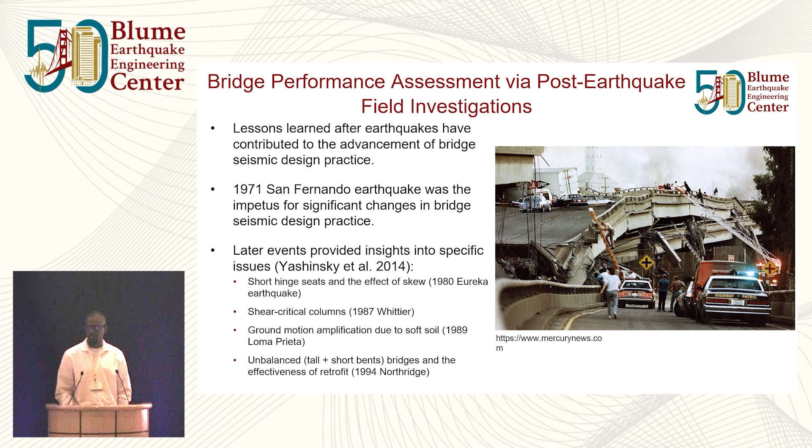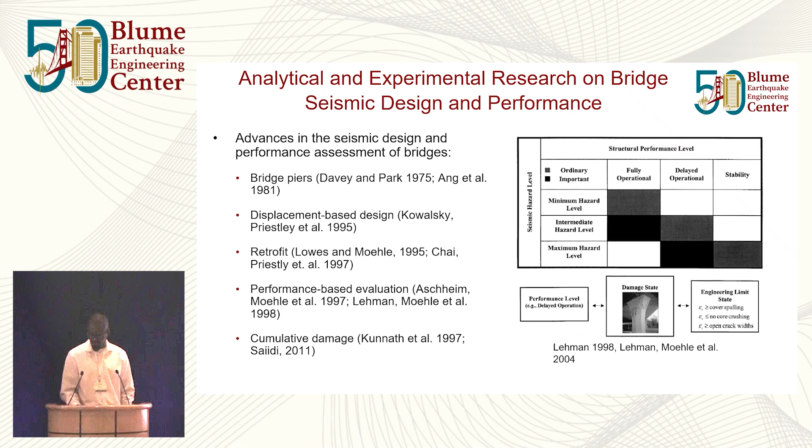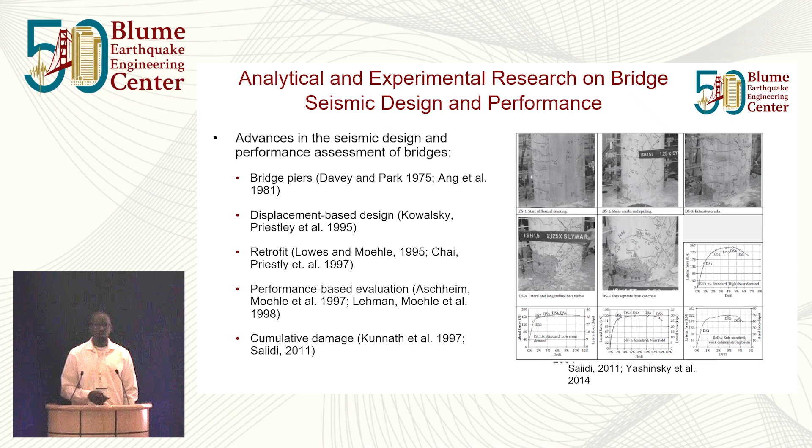And cumulative damage of bridges, that's something that we as a community started thinking about as early as the 1990s, and we continue to think of it a lot today because it has a lot of implications to the functionality of not just bridges, but transportation networks in general. And so a lot of that research has both informed and been informed by a lot of the guidelines that have been developed over the years.

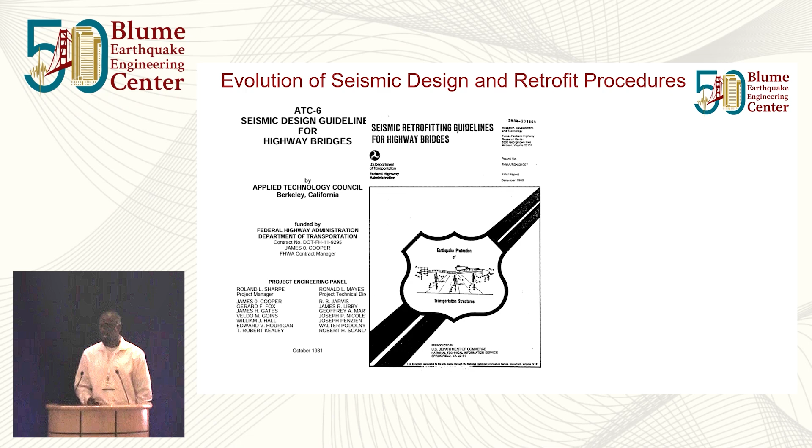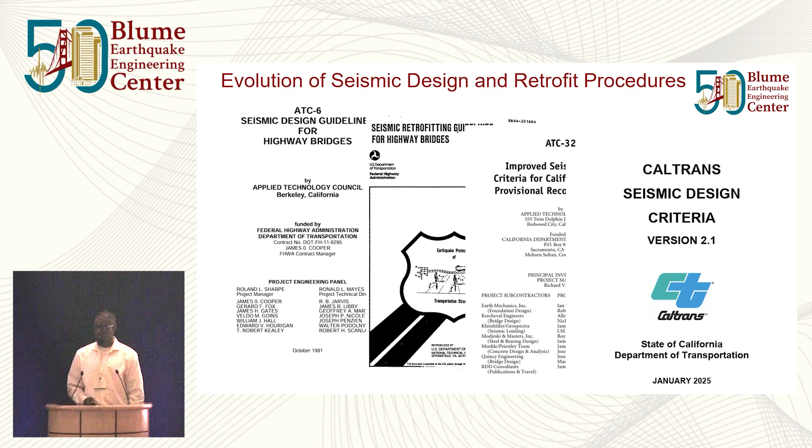So one of the things we learned from both the Loma Prieta and the Northridge earthquakes is that with damage to bridges, you can have consequences that propagate throughout the transportation network. And so we started to think about ways that we can develop these large-scale simulation models to manage the risk to these transportation networks.

And to give you a sense of the scale of the problem, for the Bay Area bridge network, we have more than 4,500 bridges, and these are connected by a road network with more than 32,000 segments, accommodating more than 20 million trips per day. And there are other modes of transportation that facilitate millions of trips per day.

So very early on, Professor Anne Kiremidjian and Nesrin Basöz did a study looking at data from the Loma Prieta and the Northridge earthquakes. The idea here was to do a data-driven investigation of the damage during these two earthquakes. I have one particular finding from that study that I thought was interesting.

I know there are a few people in the room developing these large-scale simulation models for bridge networks, and it's a single number, but I think it's a good number that can be used to sort of ground our models in some sort of reality: less than 5% of the bridges exposed to ground shaking were damaged. So that's something we can keep in mind.

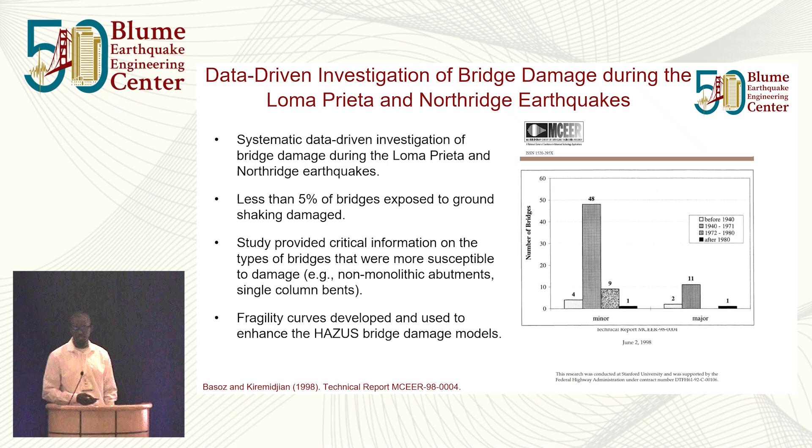And so this study was published as part of an MCEER report, and it also provided very important information on the types of bridges that were more susceptible to damage. And ultimately, they also used that data to develop fragility curves that were implemented in HAZUS, which is widely used even today.

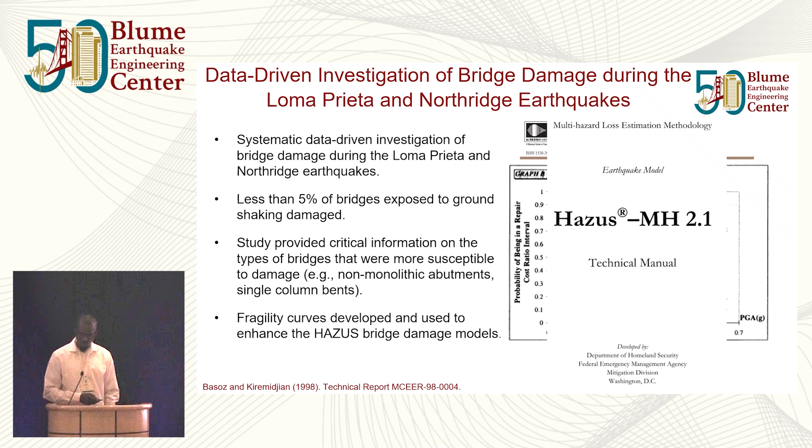Later on, Professor Kiremidjian and her colleagues basically pioneered these large-scale transportation models that looked at not just different types of seismic hazard, but brought together the inventory of the network as well as the transportation operations within that network, to quantify risk not just in terms of repair costs and physical losses, but also in terms of operational loss, things like accessibility, delays and things like that.

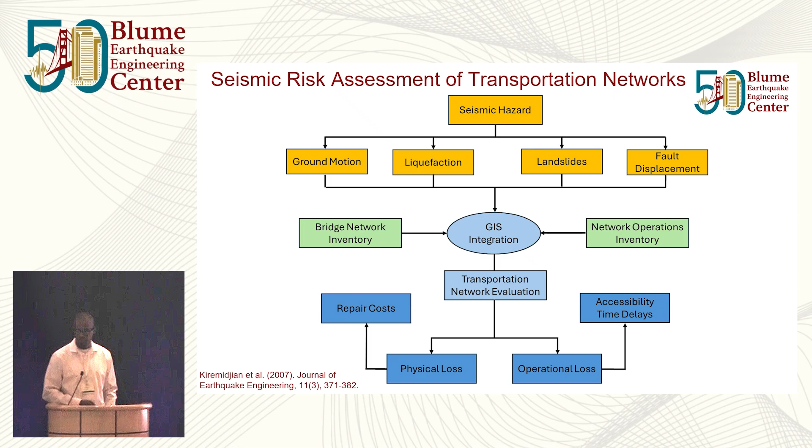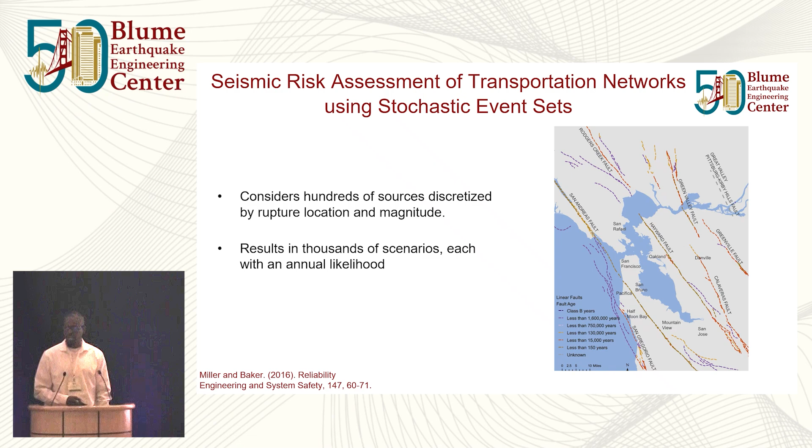Again, building on that, Jack Baker and his team started looking at these transportation systems, but instead of looking at just a single or a few scenarios, they started looking at thousands of scenarios. So this slide is based on some work by Mahalia Miller, and they developed this four-step process that starts with characterizing the ground motion intensity map for those sets of scenarios, and ends with assessing impacts at the community level.

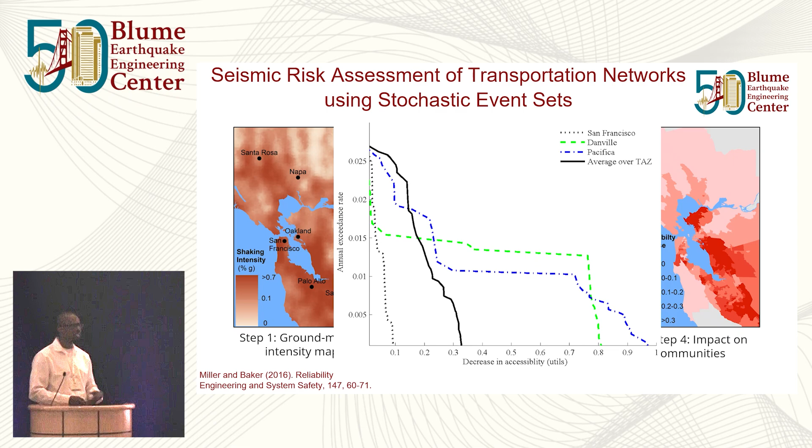And by using these stochastic event sets as the input for these types of assessment, you can start to characterize these community impacts in terms of some annual rate of exceedance, or you can look at some period of time and some performance metric and try to quantify the probability of exceeding or meeting that metric within that period of time. Now, when you start doing these regional risk assessments with these large sets of scenarios, it starts to get computationally expensive.

So one of the things that Mahalia and Jack looked at was developing a procedure that allowed you to select a subset of the ground motion maps and use them for your risk assessments, such that the final result would reflect the performance you would get from the full set. And this actually built on some earlier work done by Rachel Davidson and her group, another Blume Center alumna.

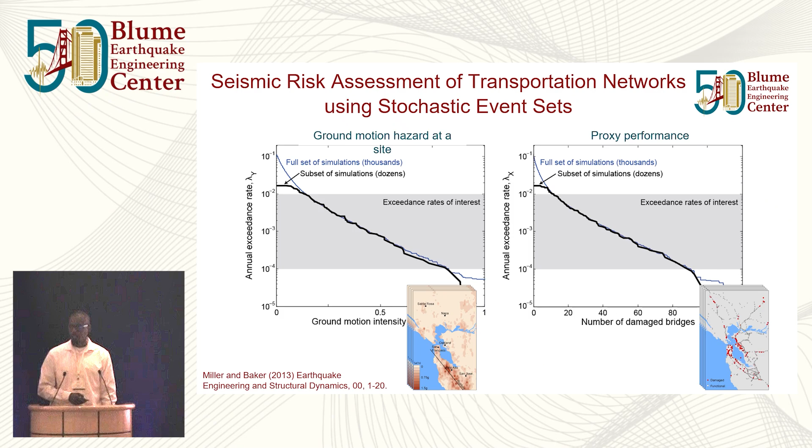Again, Jack and his team continue to build on that work. This is some work from Rodrigo Silva Lopez. He was thinking particularly about developing optimization algorithms to be able to prioritize the retrofit of bridges within a network. And in doing so, they thought about considering socio-economic disparities in the earthquake impacts.

And one of the things that came out of that was that if you want to inform policies that reduce risk in an equitable manner, then you have to disaggregate the losses based on income and other types of socioeconomic metrics. Okay, so

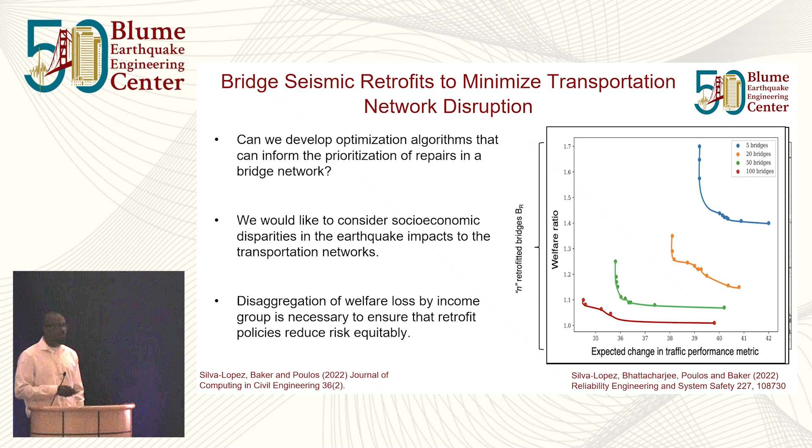Starting to think about, so Abby was talking earlier about functional recovery of buildings. And so there's a national push that's happening there of building, and at the same time, a lot of the same activity was happening for Lifeline. So this is a NIST report that was led by Ayse Hortacsu, another Blume Center alum, and we had some other participants from the Blume Center, Anne Kiremidjian, Farzin Zareian. And the idea here was to develop an initial framework to design Lifeline infrastructure for functional recovery.

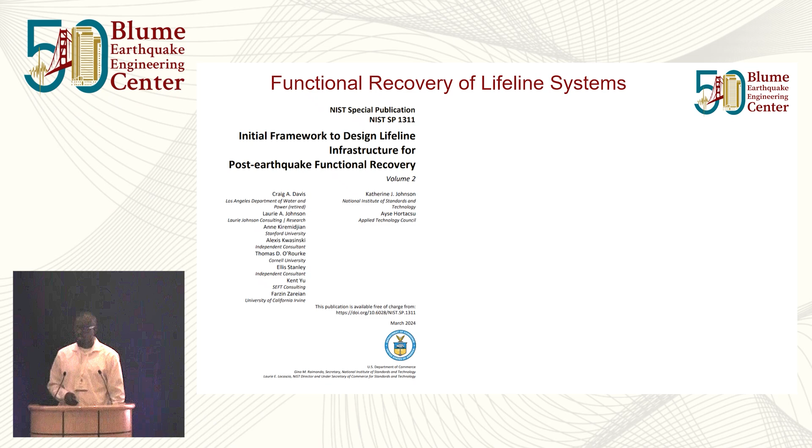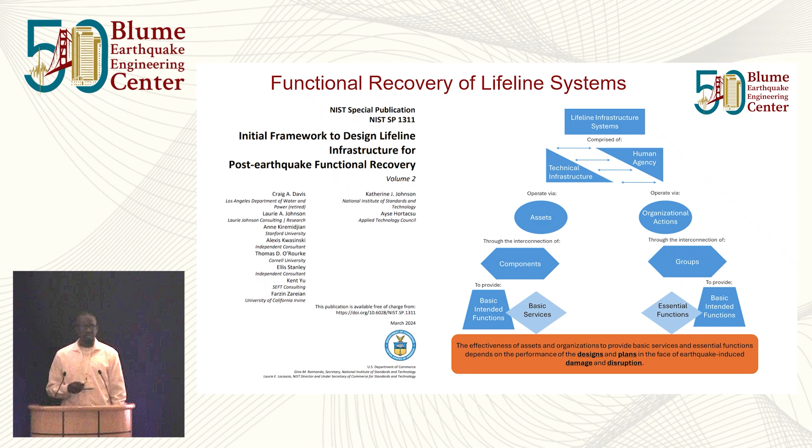So with that in mind, my group at UCLA, we've been working to develop a framework for modeling post-earthquake functional recovery of bridges. And we started this work at a time when there was a lot of work already done for buildings in the functional recovery space. So we started to think about, okay, when you think about buildings and bridges, what are some of the ways that the thinking in terms of functional recovery would have to be different?

So for example, the ownership structure is different, right? So buildings are generally owned by homeowners, businesses, and the repair efforts tend to be very decentralized, whereas with bridges, they're owned by transportation agencies and the repair efforts are generally more centralized. The way you define recovery states and disruption for buildings is different for bridges. So that's something that we had to think carefully about. And then the financing, which is an important part of the post-earthquake recovery because these repairs have to be financed. That's another thing that's different when you think about buildings versus bridges.

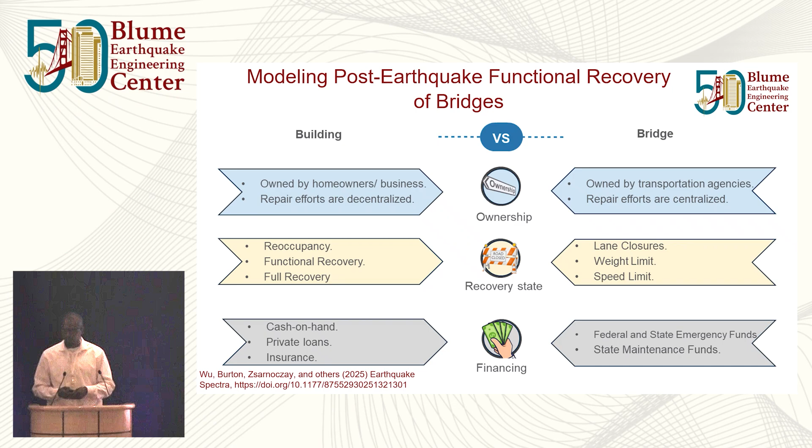So that's not good. So, some of the things we had to think carefully about was how do you go from the physical damage of the bridge to thinking about the functionality states of the bridge, right? And then what are the impeding factors that are applicable to bridges and how are those impeding factors structured? And then the sequencing of repairs of the different components that made up the bridge, that was also an important consideration. And because a lot of that is based on decisions made by the organizations that manage these bridges, we spent a lot of time talking to folks at Caltrans, as well as practicing engineers and builders from private organizations to help inform some of this.

And so, this is starting to get a little bit messy, but here I'm highlighting some of the complexity associated with just the impeding factors themselves, some of the issues related to the sequencing that you need to consider for the repairs of components, and then some of the types of results that you would get. So you would get something like the probability distribution of the functionality states. You can get information on which impeding factors dominate the recovery, as well as which component repairs also dominate recovery, and then also quantitative information on the recovery time distribution.

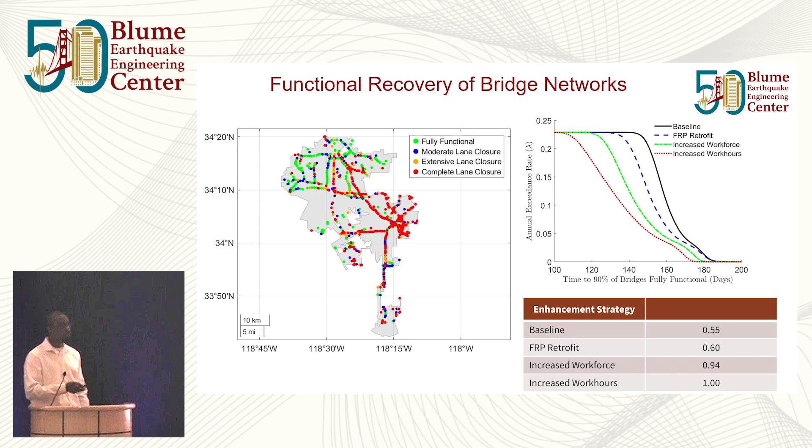And so what we're doing now is trying to scale that up at the regional level and think about different types of interventions. So interventions that range from retrofit of bridges or interventions after the event, like increasing the workforce, and thinking about how those can improve the resilience at the network scale. Now, as we start thinking about doing these high resolution simulations for these regional assessments, we can start to reflect on how we've advanced the vulnerability characterization of bridges over the years.

So, for example, the earlier studies that I mentioned that did these bridge network risk assessments use the HAZUS fragility curves that are defined at the system level. So you can think of these as sort of low definition, low fidelity bridge definition, because we're not really getting any information on the impact to the various components.

The functional recovery methodology that I mentioned earlier, we actually used component level fragility. So this is based on a lot of work that was done by Reggie DesRoches, Jamie Padgett, and others at Rice, where you're starting to get higher fidelity information in terms of the components that are impacted and what types of repairs are going to be needed.

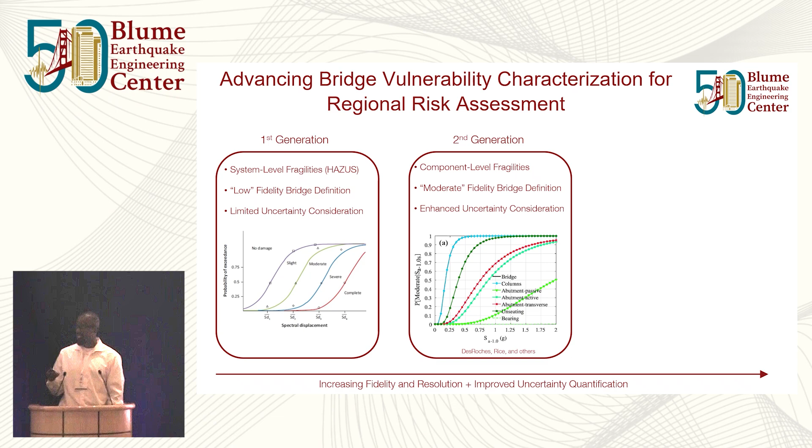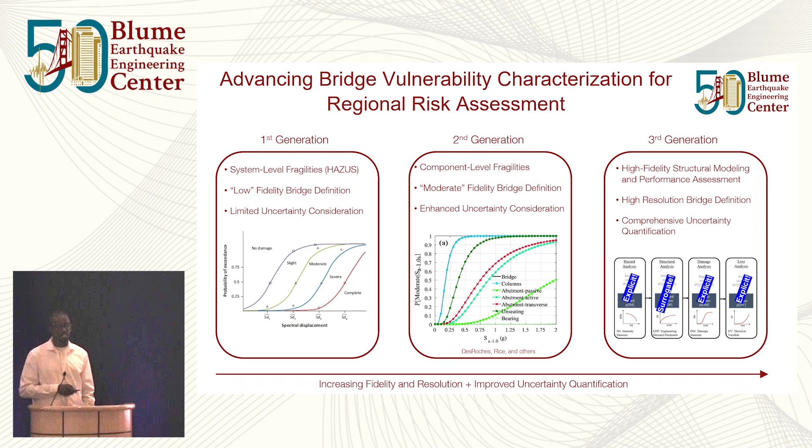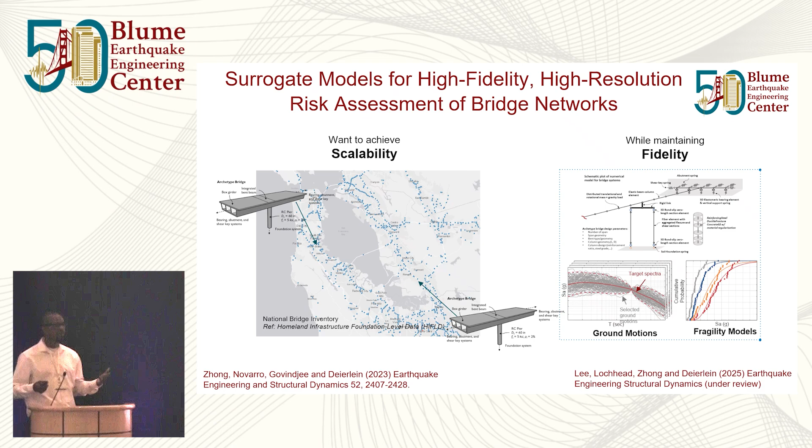But we also have folks that are starting to think about, okay, can we do these regional assessments using high fidelity simulation? And so, for example, there's some work going on right now in Greg Deierlein's group where they're trying to do these regional assessments. So they're trying to scale things up, but maintain the type of fidelity that you would typically have for bridge-specific assessment.

And so what they're doing is they're using these surrogate models to try to make this process computationally feasible. So essentially what these surrogate models do is they would take in information about the site, about the bridge, different ground motion parameters, and they would give you quantitative estimates of impacts in a similar manner that you would get if you were doing a detailed structural analysis. And the benefit there is that once you have these surrogate models trained, you would significantly reduce the computational time that's needed to do these types of assessments.

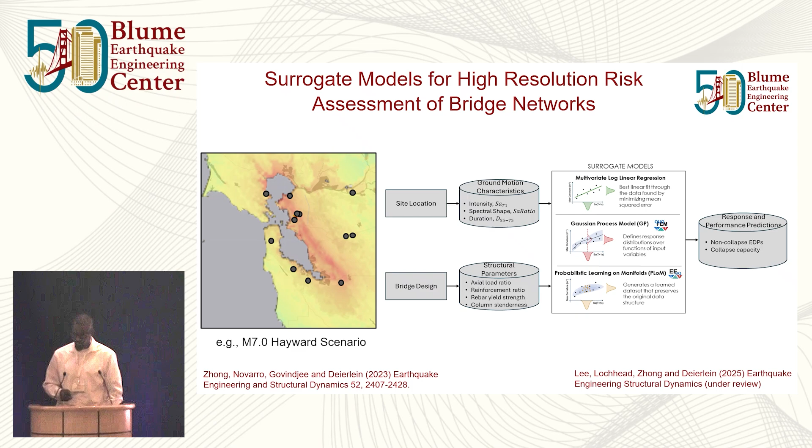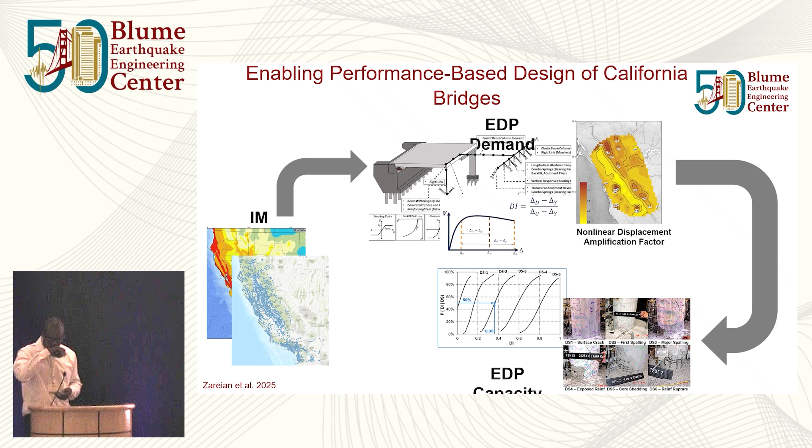So as we think about future research, I thought I would reflect on this National Academy study that I had an opportunity to participate in, where the focus was trying to give transportation agencies throughout the country state-of-the-art information that can be used to help make decisions about investing in transportation resilience.

And so as we started this effort off, one of the things we had to acknowledge was that when it comes to these investments, the leaders of these agencies have really tough choices to make about where to invest their dollars, because usually there are a lot of different issues going on. So one of the things that permeated this effort was the need for a cost-benefit based decision support system.

And as we think about strategies for enhancing resilience, one of the things that came out was that we need to be thinking about strategies that could limit damage, but also strategies that can be implemented after the event, because oftentimes from a cost effectiveness standpoint, it's those post-event strategies that end up being more cost effective and realistic to implement.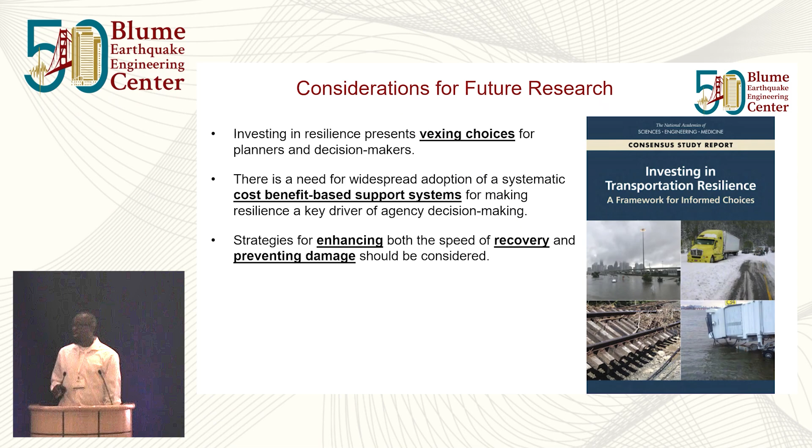Another lesson that we learned from talking with a number of different transportation agencies throughout the country is that a lot of the models developed in research do not make their way into practice. Part of that is just lack of awareness, but part of it has to do with model complexity. And one of the challenges is if you have a model or decision support system that's developed for a single mode of transportation, from a cost effectiveness standpoint, it's harder to justify use. So there needs to be work done across different modes of transportation.

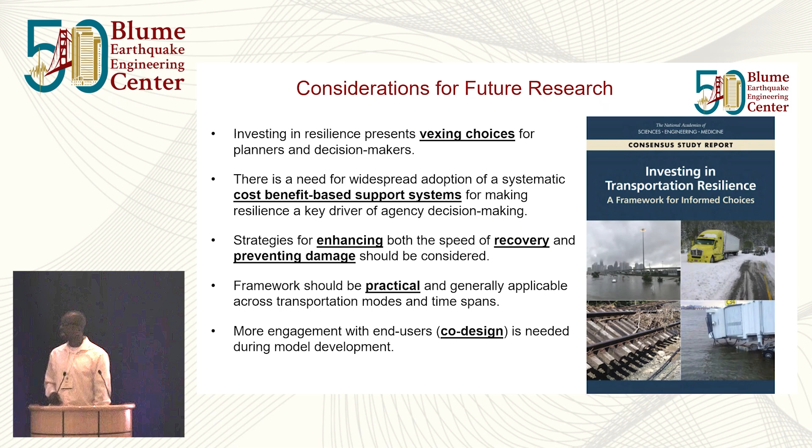And so with that in mind, one of the recommendations that came out was engagement with end users earlier in the model development process, maybe even as early as the model conceptualization stage.

So the implication of this is that now, when you think about an earthquake and the type of disruption that it can cause, you can have damage that propagates within the communication system, and this has to be considered in the risk models that we're developing in the future.